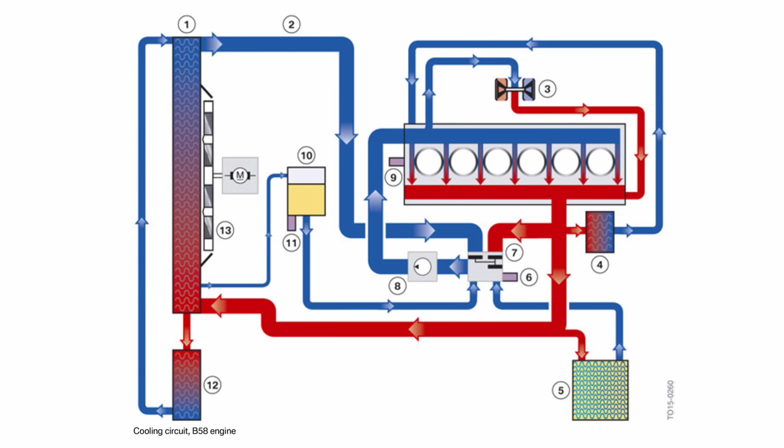Now, the idea behind max cooling mode is simple. You get as much cooling as possible to protect your engine components so that you don't have a risk of overheating. But at this point, I haven't actually seen overheating be an issue on the B58s for a couple of different reasons. The main thing to understand is that our cooling system is pretty complex.

You have two completely separate cooling circuits. You have the low temp circuit, that's for your intercooler, your air conditioning, and I just recently learned even on the mild hybrid cars, it cools off the 48-volt battery. So that is designed to run at a low temp no matter what. And then you have the separate high temp circuit, and that's what cools off your engine, your turbo, it heats up your heater core, things like that. So you have two completely separate circuits that are designed to do different things and run at different temperature ranges.

Then you also have three different water pumps. You've got two water pumps on your high temp circuit and one on your low temp circuit. Now, two of them are electrical pumps, so they can be turned on and off by the DME, but you also have a mechanical pump now, and that's the one running off of your engine, and as long as your engine is running, that pump is turning. So that one you can't really change how it's running while the engine is on. So in reality, the max cooling mode can't change everything.

The only thing that it can change is what's controlled by the DME. So that of course includes the two water pumps, the one for your turbo, as well as the one for the low temp circuit, but it can also control what's called the heat management module. And this module is a BMW thing that of course is reinventing the wheel. For years and years, we've had cars that run off of a thermostat controlled system. So basically the thermostat stays closed until your coolant and engine gets up to a certain temperature. Then it opens up and allows coolant to flow through the entire cooling system. So the heat management module replaces all of that.

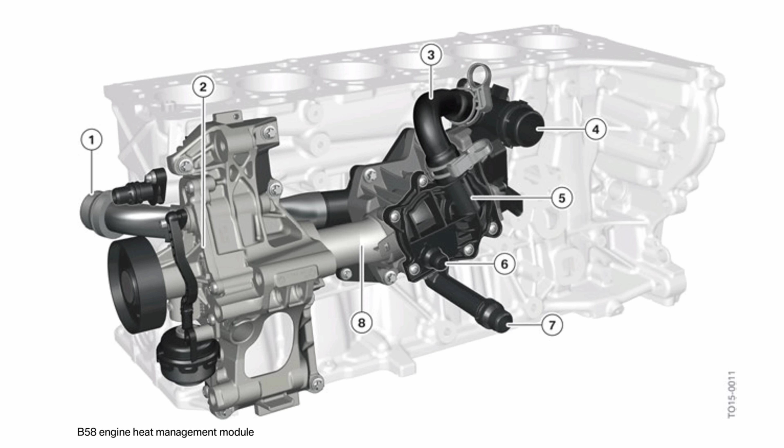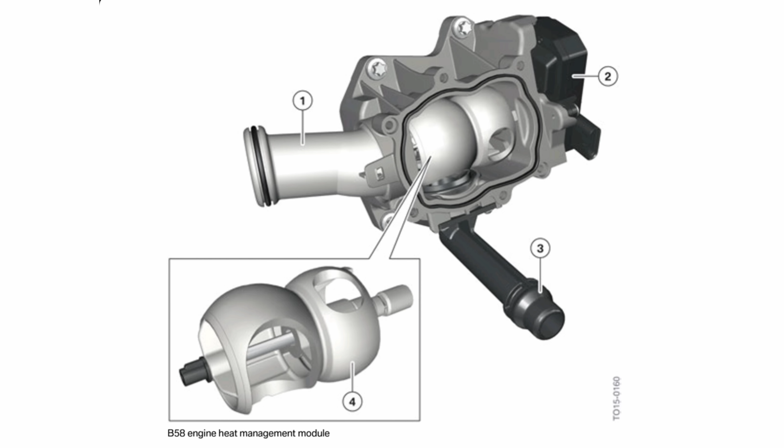We no longer have a traditional thermostat, and instead we have this heat management module. Now it's bolted onto the side of the engine. As you can see here, it's attached to the mechanical water pump, but even though it's always running, the heat management module gives it some control of where the actual coolant is going. So it has an electric motor that turns a little rotary valve inside of it, and that has openings and vanes that sends it to different coolant hoses, so it only goes to the areas where it's actually needed.

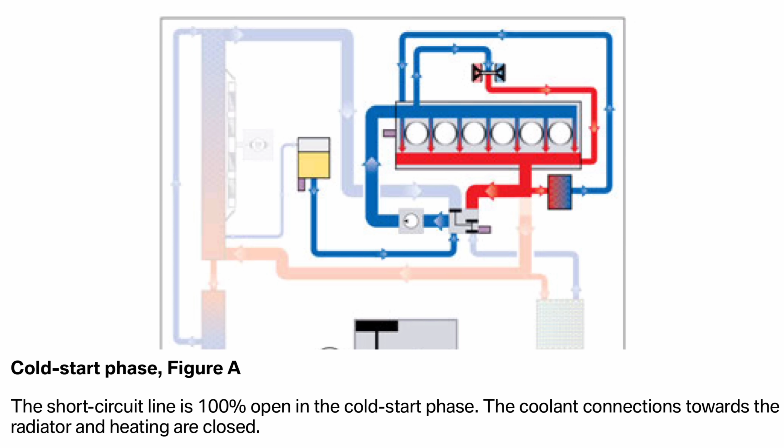Now, on a completely stock tuned normal operation, there are four main phases that the heat management module runs through, and this is a diagram kind of showing how it all works. So you can see on the cold start phase, basically coolant is only staying in the engine. It's kind of short circuited and skipping all of the other cooling components. The reason is because if you have coolant flowing through your radiator, especially on a really cold day, it's going to take a lot longer to warm up because you have such cold air cooling off that coolant.

So this basically keeps everything inside of the engine so it can warm up as quickly as possible.

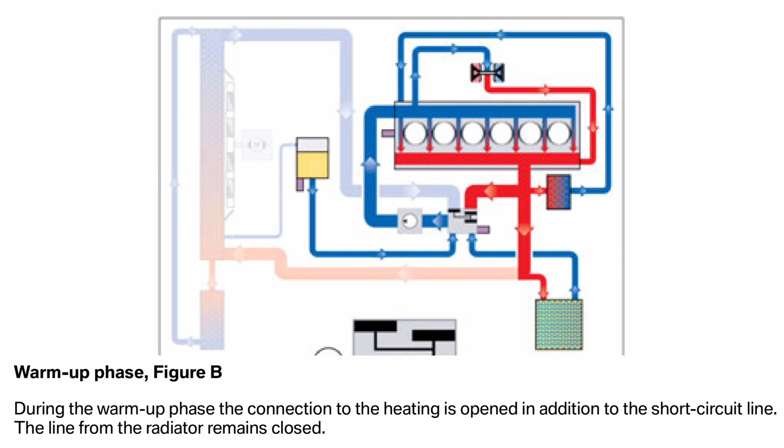From there, we move over to the warm-up phase, and a really cool feature here is that we're now sending coolant to the heater core. If you've had older cars with a more traditional system, on a really cold day, if you turn on the car and turn on the heat right away, it's going to blow a bunch of cold air in your face, which can be really annoying. With the heat management module, BMW is now able to control when coolant is actually going to your heater core and when the heater will actually start blowing hot air.

So that's why when you first get into your car, especially on a cold day, you might have the heat on, but no air is coming out. After driving a couple minutes, then you start feeling it, and that's because it's opening up that coolant circuit and only blowing air when it knows the coolant is above a certain temperature.

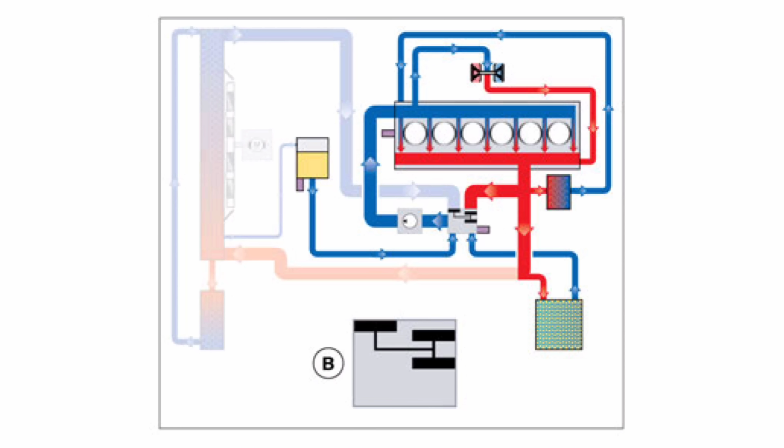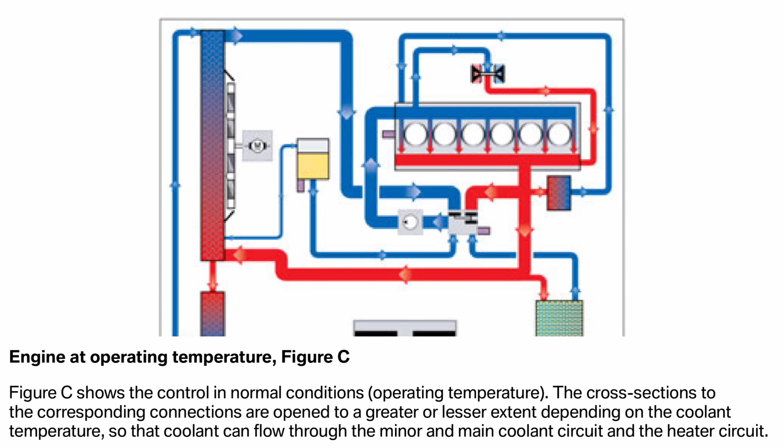Now, after you've gotten through the warm-up phase, you get to the normal operating phase. This is just regular driving after the car's warmed up and you're running your errands or whatever. It's going to stay in this range, and what's going to happen is you're constantly going to have the heat management module changing where coolant is flowing to keep your engine temperatures at a specific range. It doesn't want it too cold, but it doesn't want it too hot, and it can add or reduce cooling depending on the conditions of your engine.

So this is really a key point we're going to come back to. It's not trying to keep it as cold as possible, but it also doesn't want it to overheat. It's going to keep it in that safe operating range where everything is designed to run.

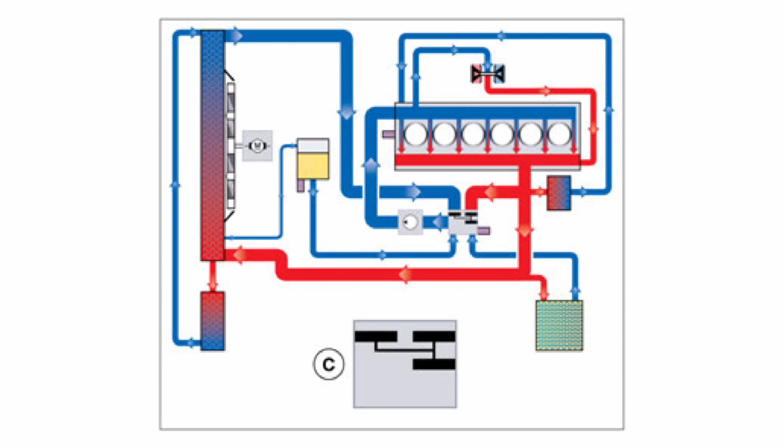And then finally, you have the max cooling setting, and this is where everything shuts off. It sends only 10% of the normal rate of coolant to your heater core, but pretty much everything is dedicated to cooling off the engine as much as possible. So this is kind of like an emergency situation or really high load. You'll have all of the coolant flowing through all the radiators, all the heat exchangers, making sure you're getting the absolute maximum amount of cooling possible.

Now, some of this you can monitor in the car, but not all, especially if you have like a 2 Series, an F22 or F21. You don't actually have a temp gauge inside of your cluster, so you'll have to go into the hidden menu to see how these things are being managed.

Now, as far as an operating range is concerned, I think this is the most critical piece to understand, because if you're not at the normal operating range, then you are at risk of a lot of things happening. The big one, of course, is just burning off moisture.

Moisture and water vapor is a natural product of the combustion cycle, so that means it's going to be coming out of your engine when it's running normally, and it's also going to get mixed with your oil. Because of that, it's really important for your engine to get up to 212 degrees and stay there as long as possible so that all the moisture in the oil can evaporate.

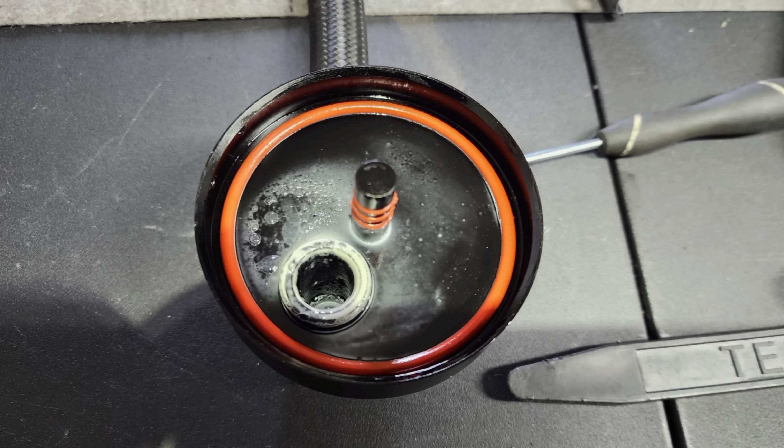What you'll find sometimes is, especially in seasons like now, it's dead of winter, it's really cold, and if you're doing a lot of short trips where your engine doesn't warm up, you'll notice that your oil is starting to get like this brownish, kind of chocolatey looking mixture. The reason is because you're not burning off that moisture, so a lot of the water is just staying in the oil. And the only way to really fix that is to do more frequent oil changes or keep your engine at operating temp for longer.

So that's why it's not really a good idea to do a lot of short trips. You want to try to at least regularly get your car up to temp, run it for a good 15 or 20 minutes to get all of that moisture out of there.

Also, this puts your oil at the optimal viscosity. For one, it makes the oil thinner so that you get less drivetrain losses, more efficiency, better miles per gallon, all of those things.

But I know a lot of people are like, well, you don't want oil to be hot, or you want it to be as cold as possible. But the exact same reason why you don't beat on your car when it's cold is the same reason why you don't want to overcool your engine.

And you can kind of see where we're going here. But if your oil isn't at the ideal operating temperature, then the viscosity will be too thick. It won't be able to effectively lubricate all of the components in your engine, and you can definitely risk damaging things.

And then even all the seals and gaskets inside of the engine are generally designed to seal the best at operating temperature. So when things are cold, there's going to be bigger gaps, and as it heats up and expands, it's going to seal up all of those systems and make sure that you have the most efficient engine running possible. So yes, a lot of this is designed just for emissions and things like that, but you still get to take advantage of a more efficient system when you're looking for the best performance. So all around, it's going to be best to keep your engine at operating temperature.

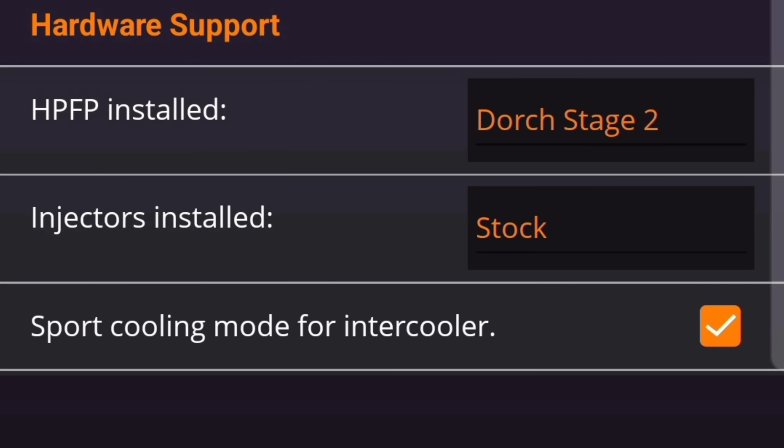Then they also have the sport cooling mode for the low temp intercooler circuit. And this one separately turns on the water pump for the low temp circuit sooner to keep IATs lower. So this, I think, is a key difference between the two, and this is why I kind of prefer MHD's implementation, because you can only turn on the one for the low temp circuit to keep your intercooler temps as low as possible without actually turning on the one for the high temp circuit and cooling down your engine.

And they also specify that it only happens when you floor it. So when you get on the car and beat on it, or when the temps are really hot, then it'll activate that lower coolant temp target.

So now let's bring this full circle. Why do I think this is a bad idea? It's exactly what I said: it doesn't let the car get up to operating temperature as quickly as possible, and it doesn't keep it at operating temperature as long as possible, especially in the most demanding scenarios.

A lot of you guys have reached out to me and said, hey, I'm driving my car and I don't want to beat on it until it warms up, but the needle's barely moving or it's stopping short, not getting up to the normal operating temp. What could be going on? Pretty much all of you have max cooling mode turned on, and when you turn it off, the operation goes back to normal.

So that's something that I'm really not a fan of, and I've tested it myself. I've seen that the coolant targets definitely drop, and it very easily keeps the coolant temps lower. But there's never been a scenario where I feel like that's actually an advantage.

I would even challenge you guys to go out there and find anybody that has issues with a B58 running too hot—anybody dealing with overheating, blown head gaskets, messing up your coolant system. I haven't seen that at all.